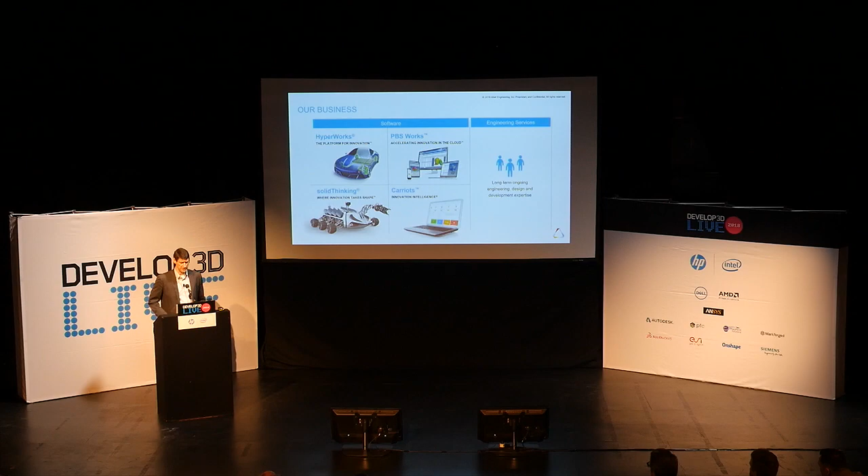So just at a glance, Altair's been around for a long time, over 30 years now. Offices across the world. We went public last year, so we're a publicly held firm. Our mission and vision statement really is to transform the way people do design. Since we come from a simulation world, our goal is really to put simulation in the driver's seat for design. And I want to talk a little bit about how that works, and how it's different from designing first and simulating second.

So a little bit about our core business. We're probably best known for HyperWorks. HyperWorks is our suite of CAE tools, which have typically been in the hands of advanced simulation specialists for many, many years. We really got started in the automotive industry. We're in the aerospace industry. Altair is a company that works at the high-end specialized CAE where you have to solve really tough problems. And a few years back we introduced our solidThinking lineup, which is a way to put that same great technology into the hands of designers and engineers who are not specialists in CAE.

And then we have PBS Works, which is a high-performance computing management infrastructure. Carriots is the latest offering we have in IoT. And of course, the core of our business has always been engineering services. We started out as an engineering services company, and software came second.

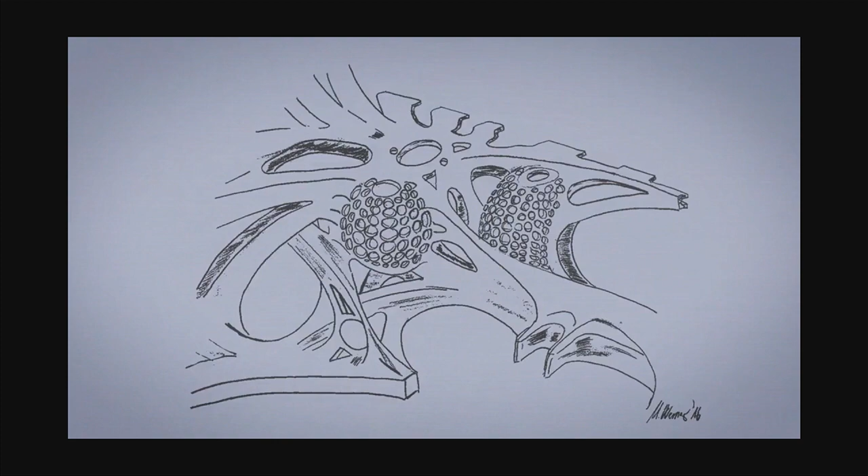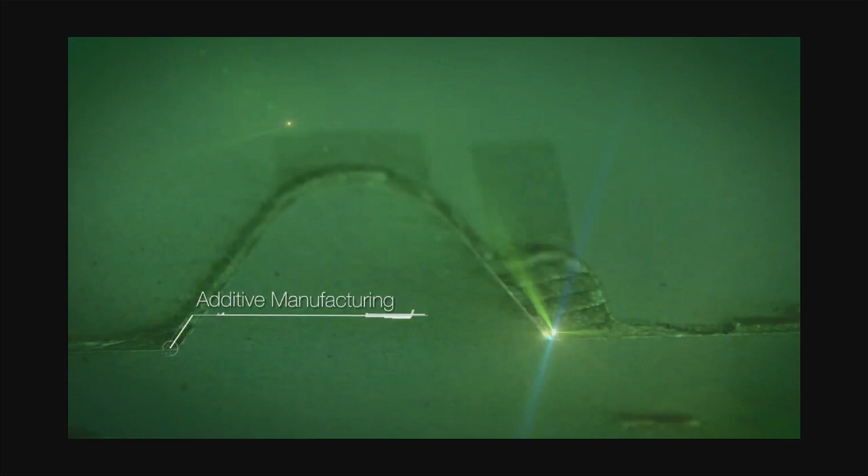So when you think about the process of design, and this is kind of the mandatory big exotic 3D print video at the beginning of everybody's presentation here. Design is changing a lot right now. There's additive manufacturing methods, there's topology optimization and generative design methods. There's a lot of new technology coming into play all at the same time, and that's creating this kind of confluence. There's another thing going on now, particularly in transportation, which is the electrification of automotive design. And that's driving a whole rethink of the way automobiles are designed.

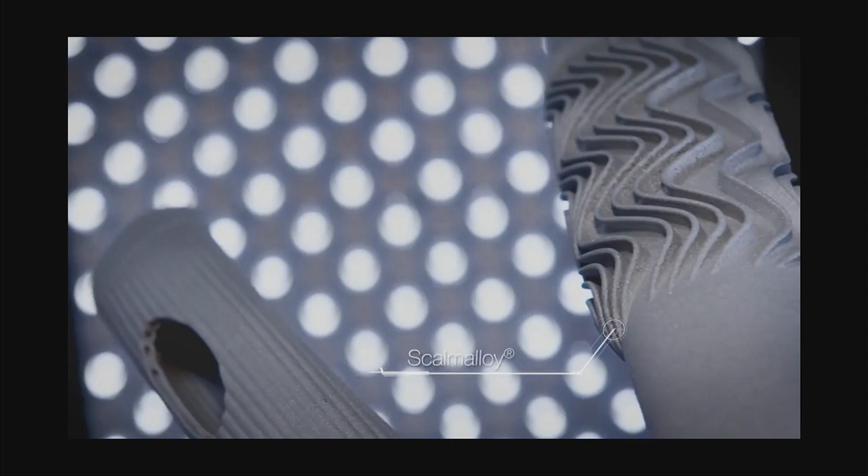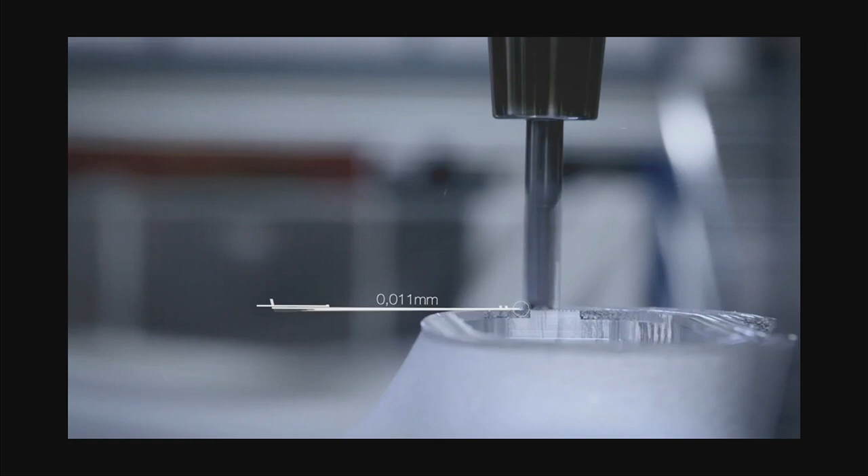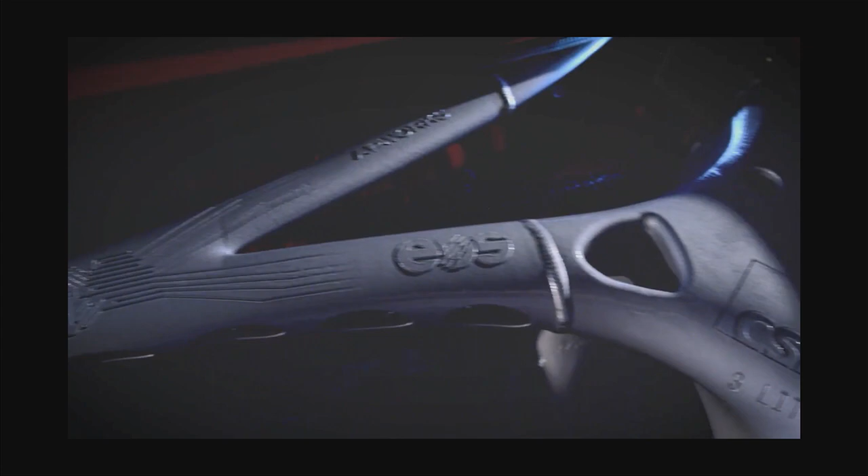If you look at this, you're probably wondering, what is this thing that's being built right here? You're going to see it at the end in kind of a reveal. You can see it's brought together topology optimization and additive manufacturing techniques. There's a lot of handcrafting going on. It's one of these stretch projects. There's milling. There's a lot of things going together. This was a collaborative stretch project between a number of companies, Altair, APWorks, CSI, and Heraeus. And when it comes together at the end, EOS was involved, and so forth. Altair gets involved in a number of these advanced projects to really stretch what can be done.

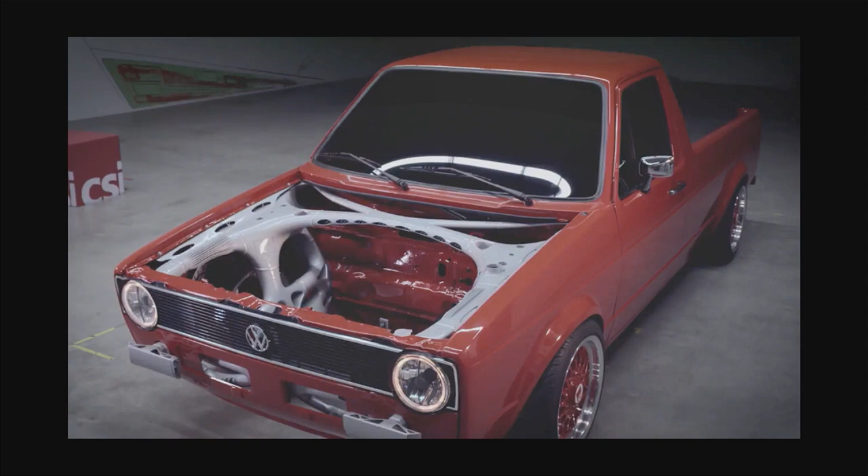So that's really the integrated structure. It's a concept structure, the front end of a vehicle that incorporates crash criteria, ductwork. If you look at all the different disciplines that went into that front structure, the idea was to bring as much functionality into a single structure as possible. So all of the cooling systems, fluid management, structures, etc., are incorporated into this concept structure. If you want a structure that's optimized for all of those things, that's a very multidisciplinary design project. We've seen a lot of examples today of topology optimization, where people just put some loads on something, get a topology out, and say, that's my finished design. That's never the finished design.

Altair has been doing topology optimization since the mid-90s. We really introduced it to the entire world through the OptiStruct product. We've been practicing its use for 25 years. And just in the last couple of years, the CAD systems are putting it in, checking the box, and it's very basic. Topology optimization is really not just about structures. It's about manufacturing considerations, and all sorts of functions that go into the part. And you've got to get the load cases right.

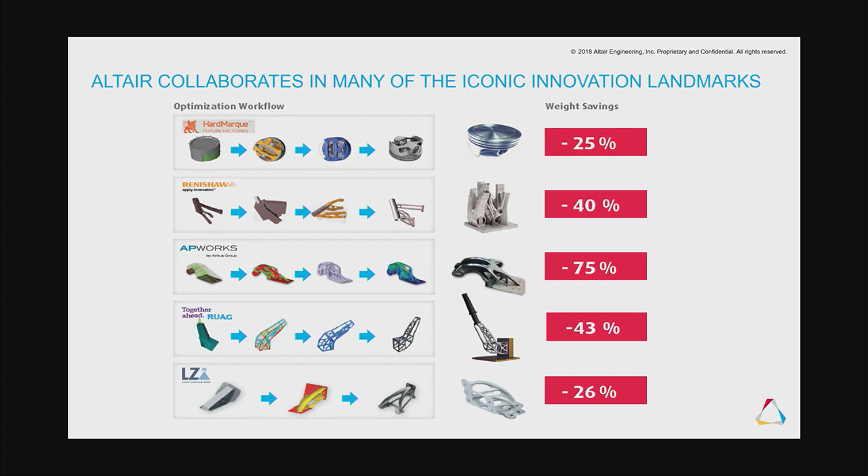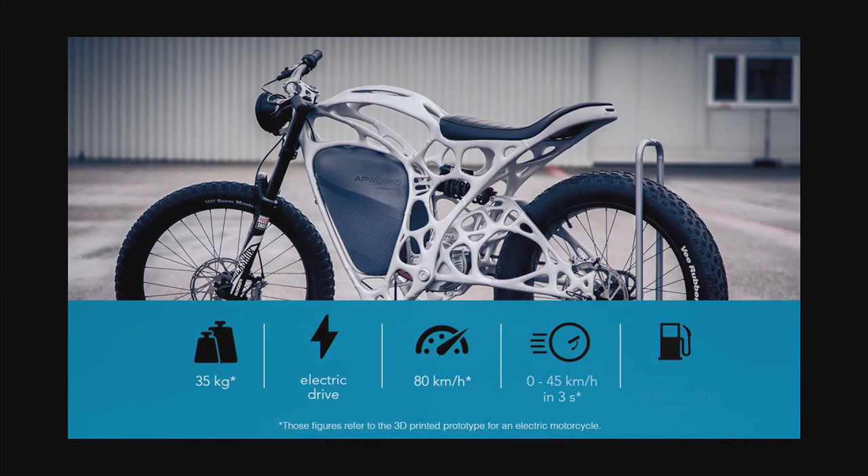Altair is always involved in these things one way or another, it seems. You've probably seen AP Works did their motorcycle project. I think everybody's got a motorcycle that's done an additive as well. We participated in that.

But I'm going to come down from these stretch projects and get a little bit more into the real world as we go forward, and begin to introduce what it really means to do simulation and optimization-driven design, not just quick topology on parts.

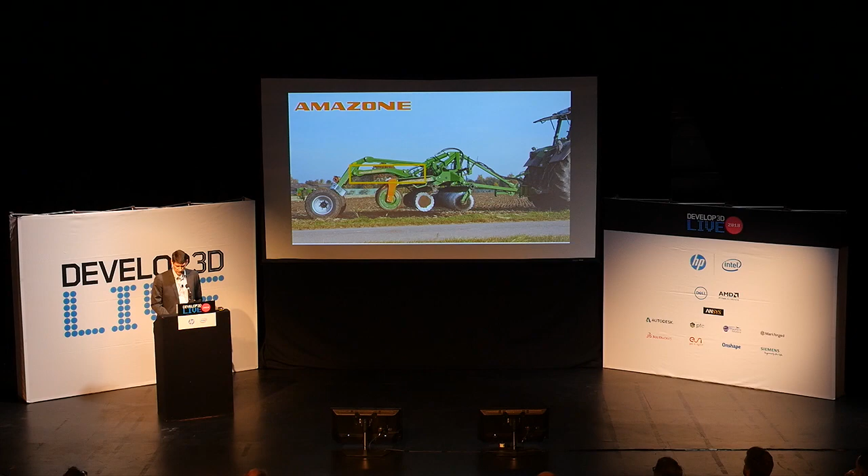So here's a project with Amazone. This is a furrowing machine that goes out and basically plows up a field. It's a very big machine. They have this central structure that's part of the main apparatus right there in the center.

They had done a design project some time ago where this was their conventional design for the structure. They had used optimization methods to come up with a lighter structure, with a lot of performance improvements. They wanted to do a stretch project out of that too, and see if they could take it to the next step where they would use a large additive manufacturing approach to build the casting.

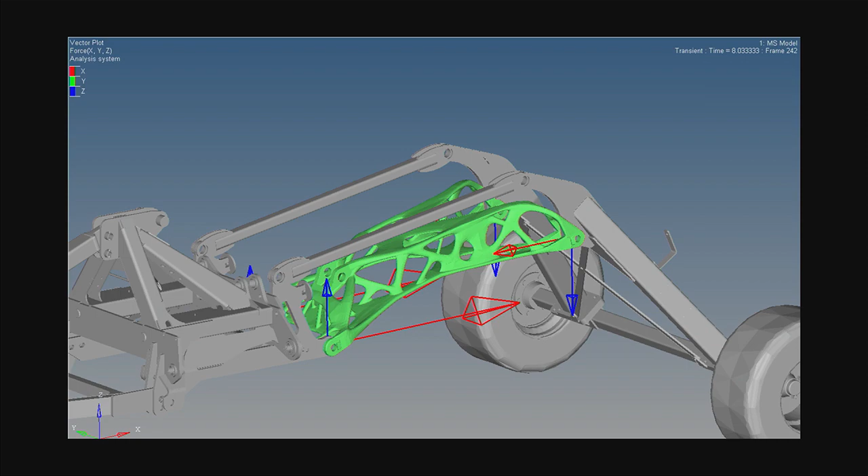Casting is still a great way to make parts. We're all excited about additive manufacturing methods all the time, and it is exciting, no question about it, but casting is by far the more important in real-world manufacturing today. But additive has a place there too, and it's to help make the castings as well. So that was the approach they wanted to take here.

Now that's a big casting if you're going to make it. So really a big part of the design project here is to see, can this thing be cast, and can it be cast efficiently in a time-effective manner, and can it be done without a lot of difficulty.

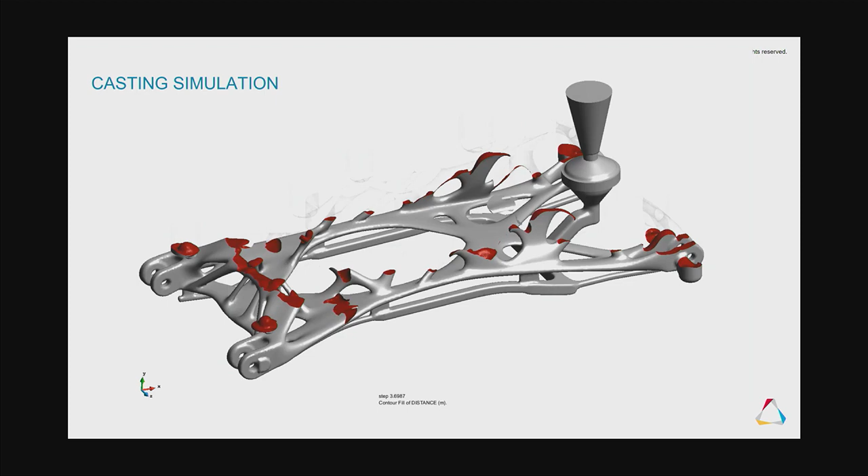So when you're designing a part, you're not just designing the topology. That was a given here - yeah, we can come up with a good structure. We know how to go through load cases and do that. But what about optimizing it further for manufacturing feasibility?

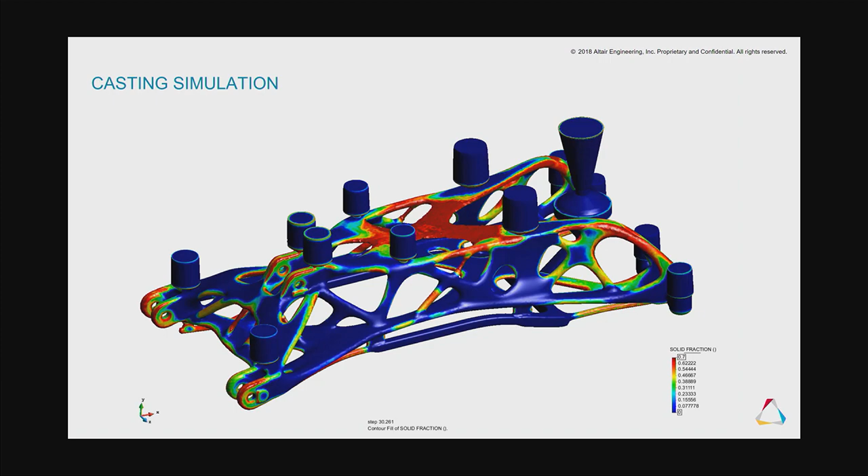So here you're seeing a simulation of the casting process. And the cooling process - well, first you need to see if things are going to fill properly. Are you going to get cold shuts? Are you going to get areas that have air pockets, porosity issues, and so forth? Then you have to look at the cool down process as well. All of these factors can influence how you might want to design that part for manufacturability.

So it's not just the basic topology optimization. It's really understanding the manufacturing process and designing for that as well.

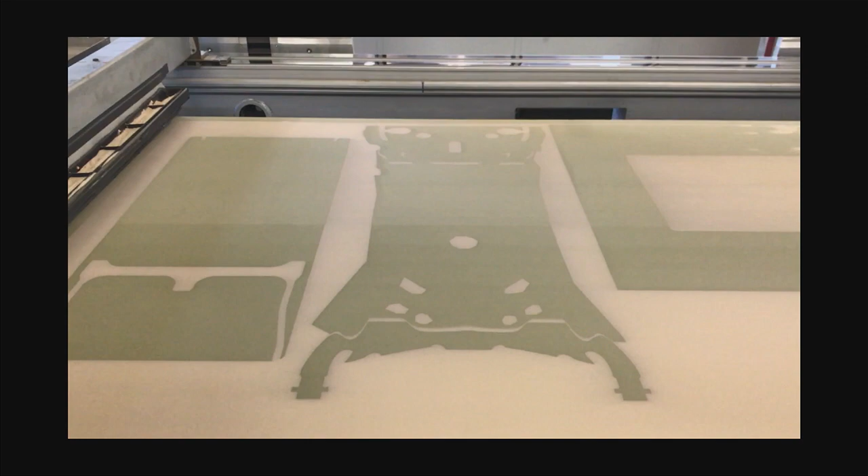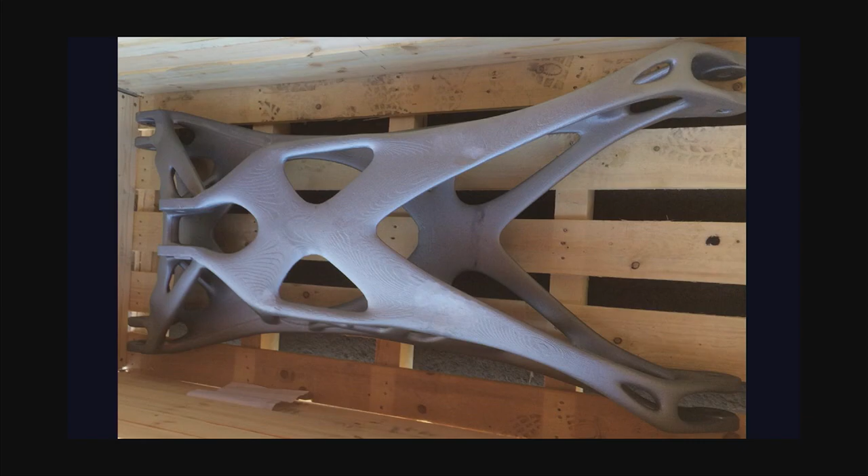And they really made the part. It goes around on display, and I think they've used it. It was a concept part. The one that's in production is the middle one there, which is optimized. And if you look at the difference between the basic welded construction versus the one that they optimized, it's substantial reductions in weight, and performance has improved tremendously.

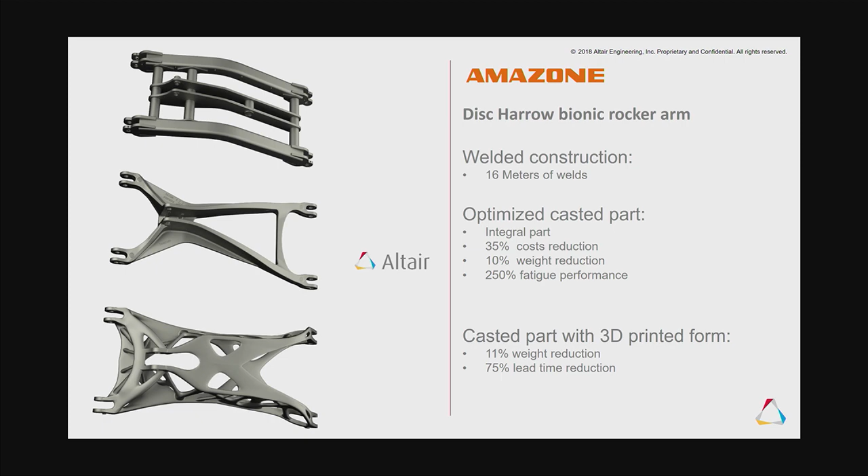And then they wanted to see if they could take it a step further with that cast part. Again, they got more weight reductions, thinner. It looks like there's more material, but there's actually less material. And they have quite a lot of reduction in the time to make that because of the casting optimization that was done on that as well.

So let's talk a little bit about the process for simulation-driven design. And for us at Altair, simulation-driven design also means making design thinking influence the way you do simulation. It's really kind of a circular sort of thing - they really have to influence each other in a loop. There's no real beginning or end to that process.

So here's just a simple project that kind of illustrates what the entire process has to be. Again, we saw a number of examples of people running topology optimization, but in reality, you have a total design project, which is: I have a certain function that I need out of the system that I'm building. Yeah, topology optimization has probably got to play in there somewhere, but I also have to do all the rest of the design - I have to size motors and springs and actuators and get the mechanicals correct.

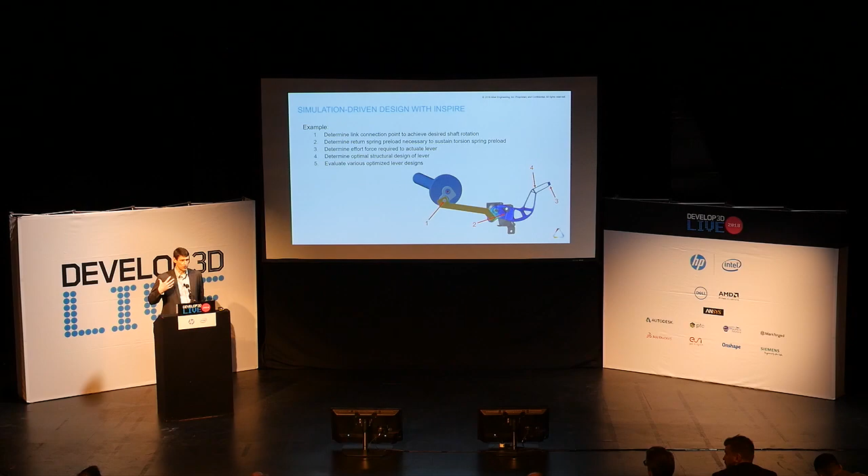And can I use those mechanicals to actually drive the loads which are governing the structure? Because when you have to just estimate loads and put them on statically, you're going to make mistakes. You really want the mechanics, the dynamics of the behavior of this part to guide the topology optimization.

That's very critical. And then you also want to be thinking about all the design iterations. The topology optimization results are never the final design, never. It's just the beginning of the design process. It really gives you ideas, it lets you explore, and then you have to do interpretations and realizations with other additional engineering knowledge that you have.

So you have all these things you have to think about, even in a very simple structure. This is, by the way, a mechanism. It's a seat lever that would be under an automotive seat that lets you lean back, forward and backwards.

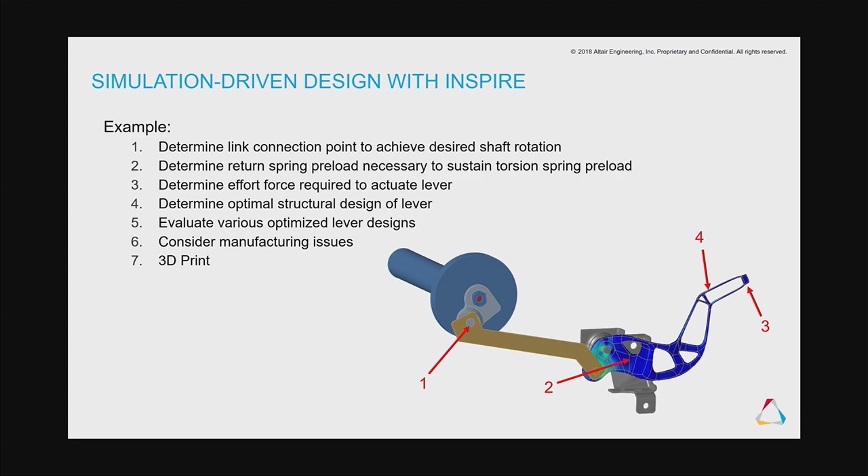Very simple structure. The design process in our software, this is the Inspire product, which has encapsulated basically a lot of our technology for designers and design engineers who are not finite element specialists.

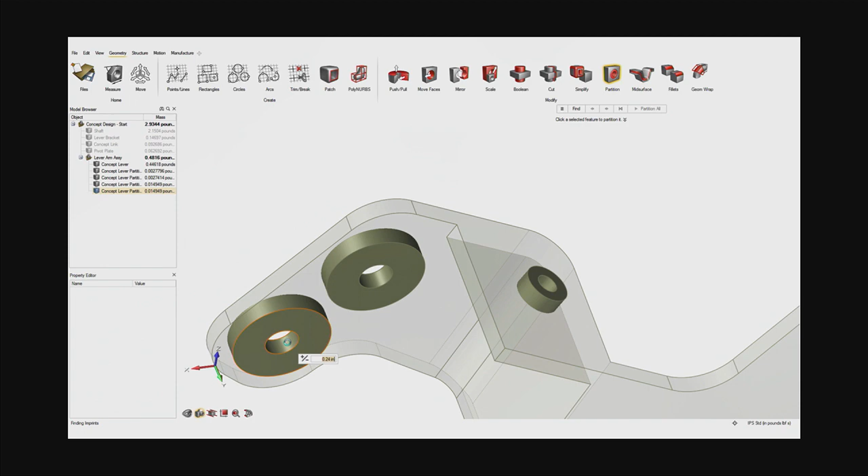So one of the things you want to do in this project is design this lever, and you want to optimize it. So he wants to have the lightest lever he can, make sure it's stiff, but he also wants to make sure that the function of this whole system is what's driving that. So he's going to set this up as a mechanical assembly.

So there's motions simulation built into Inspire as well. So here he's just taking the CAD, which is just dumb CAD, and it automatically detects all the locations where he has concentric holes and spindles and axles. It proposes joints for him. He can confirm the joints. And really just a few clicks, he can get the thing actuating.

So he's just going to apply gravity to make sure he has a legitimate mechanism here. Puts a gravity load on. Okay, so that's working. So now we can actually put this thing through its paces.

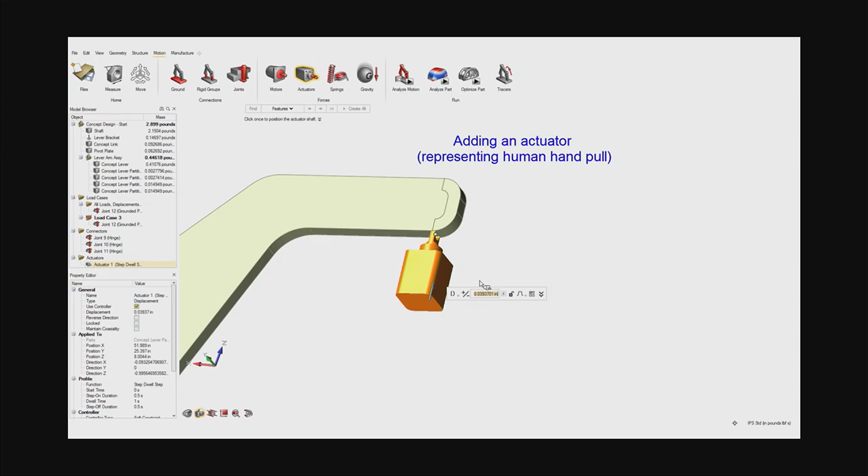So put an actuator at the end of the lever, which is where some guy's hand is going to push it. First thing he wants to do is make sure he has a proper throw, he has proper loads in the system. So he does a quick measurement. Am I getting enough throw?

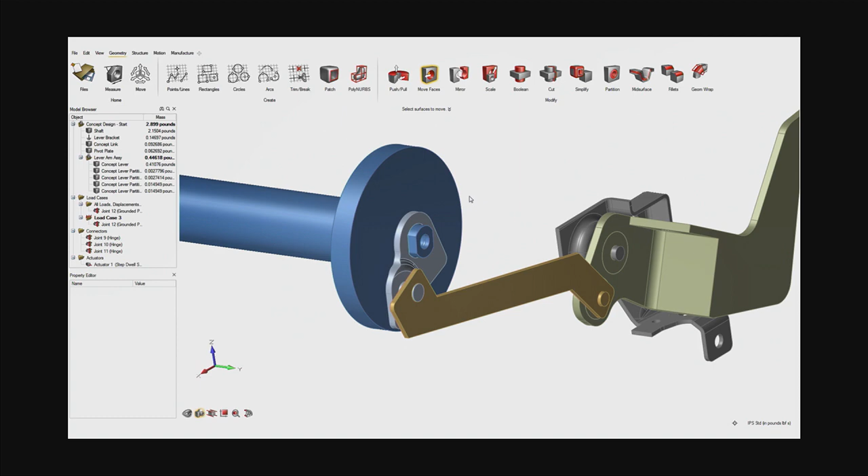Maybe not. You probably have to do some geometry changes. So he's going to move some pivot points. There's some basic geometry editing tools in here to make sure that you can do direct modeling and move your pivot points around. Then he does a quick confirmation check, moves the lever, make sure his rotations are correct for what the mechanical assembly has to do.

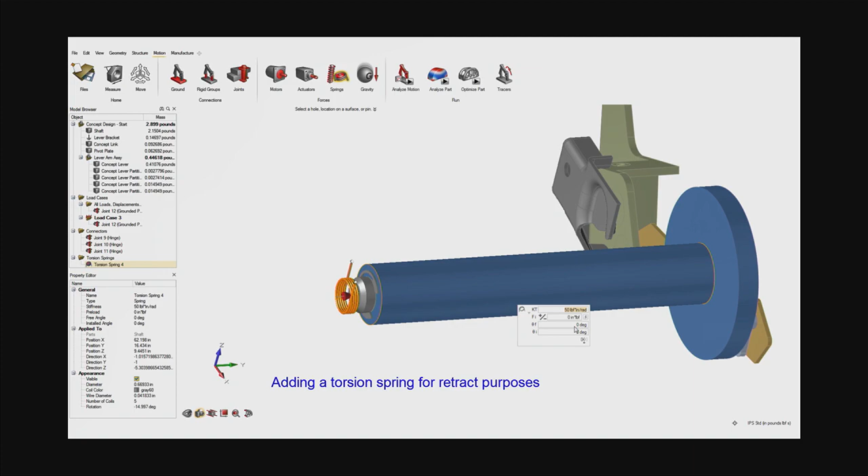And now he's got to get the loads into the system, because right now he's just moving it kinematically. But there's going to be resistance springs and so forth in the system that return it to center. So he's going to put his springs in. In Inspire, we have all these mechanical elements like motors and actuators and springs and stuff.

You just put them in, and it represents them in a kind of a WYSIWYG way, the way they really are in real life. He puts in an actuator just as a way to measure the force in that system. And again, just a few clicks, he can rerun the problem, and now he's going to have a fully statically determined system that has all of the resistance components in it, so springs and so forth.

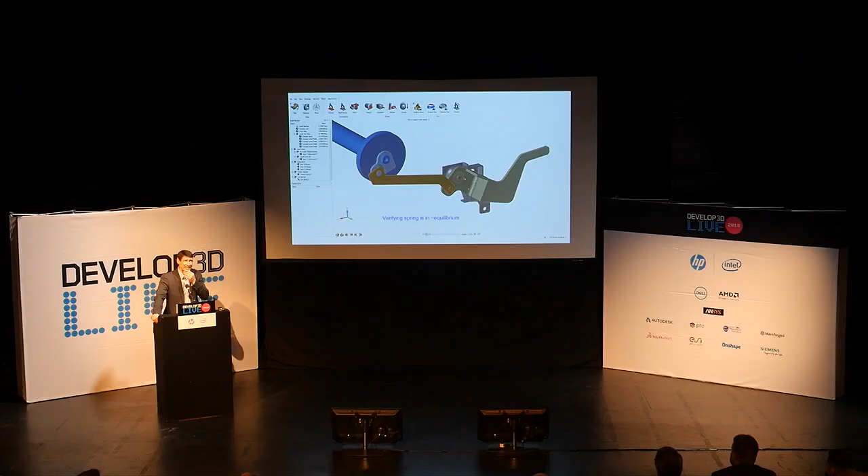So now once you have that, you can actually then get all the loads you need when you move the lever and get the topology results. The old days you would have tried to think, well, okay, I think he's probably going to put so many forces in here, I'm going to come up with a couple load cases that represent it.

What we really are doing here, we're going to run that through at every position that it can go through with the loads coming from the actual mechanism. So we know all the loads through the entire sweep of that part, and that is what becomes the boundary conditions. You don't have to guess at anything.

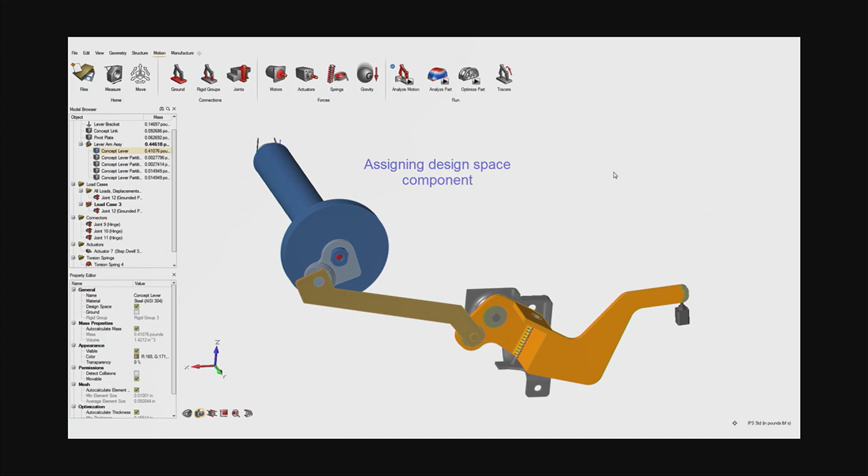So now he puts the actuator back in, and he can now run the mechanical assembly and just turn on Topology Optimization. Here he just hits run, and there's a number of different things you can ask for. We have a lot of manufacturing constraints, so if you know that you're going to be doing extrusions or castings or things like that, you can put those as constraints.

So now he has the load paths. Again, the first results, those are never the final results.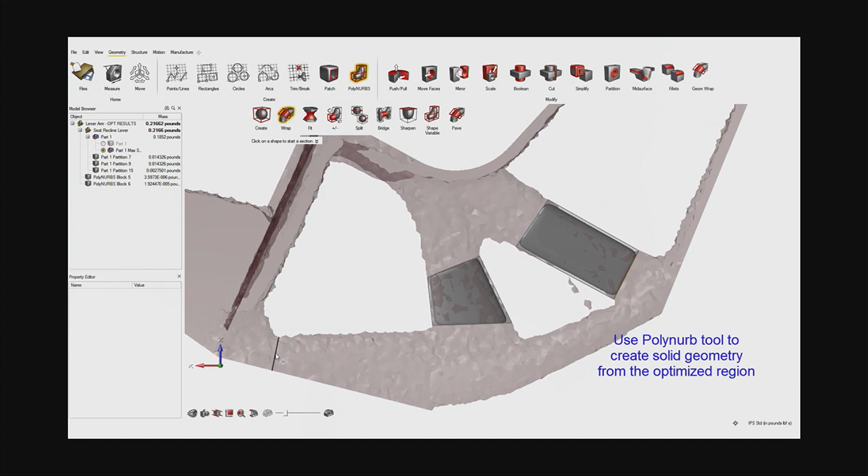Now we use a method to capture these, which is called polyNURBS, and it's a manual or semi-manual process. We're getting it closer and closer to a one-click process. But there's high value to doing that step, which is that you get this control structure around the shape of that part, and you can do further optimization on that control structure. So we don't just look at that as a final design. You may want to do further optimization, moving all those controls and the lattice work around that.

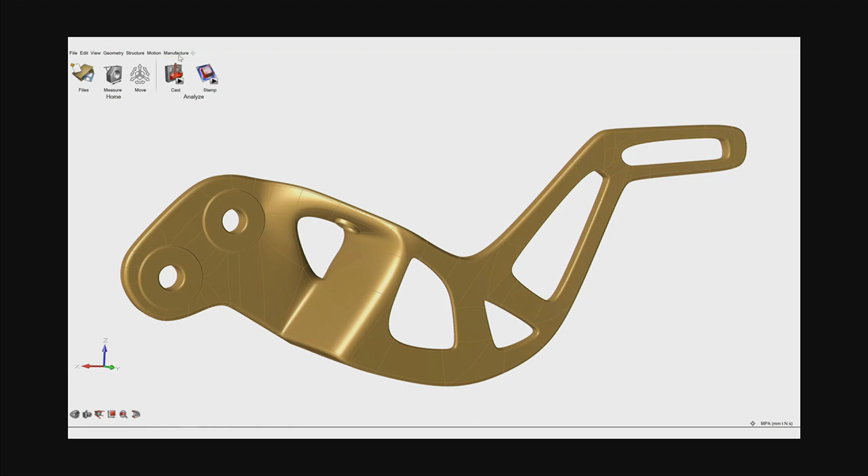Here now he's run his part, he got his optimization. He just uses the same load case setup that comes from the mechanicals. And now he's going to realize that in different forms. So he makes three different forms of this lever: one that's good for additive, maybe one that's a sheet metal stamping, and another that's a traditional casting, say.

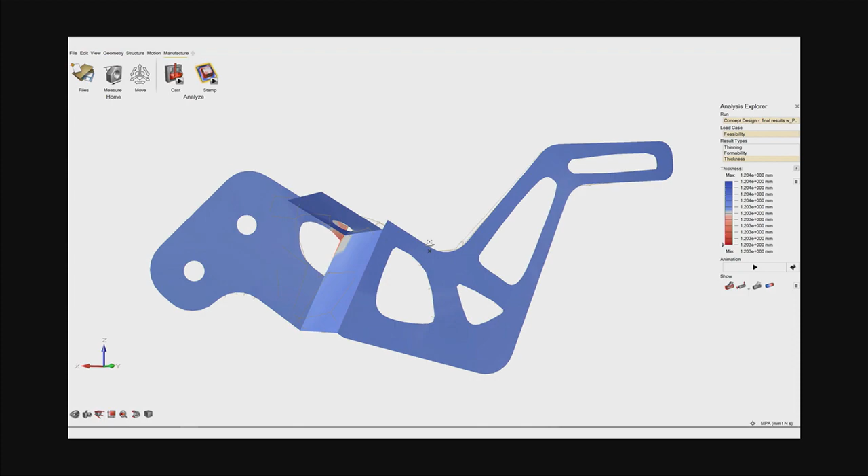So we have feasibility checks in the software as well. Here I can do a quick feasibility check for casting - just one click and it can tell me where I'm likely to get porosity issues because of typical cooling. Now I have a stamped version of the same part. I'm going to run a quick forming simulation. It can tell me where I'm likely to have thinning problems, where I'm likely to have high strains. And I might want to make quick design changes based on these really quick one-click feasibility checks.

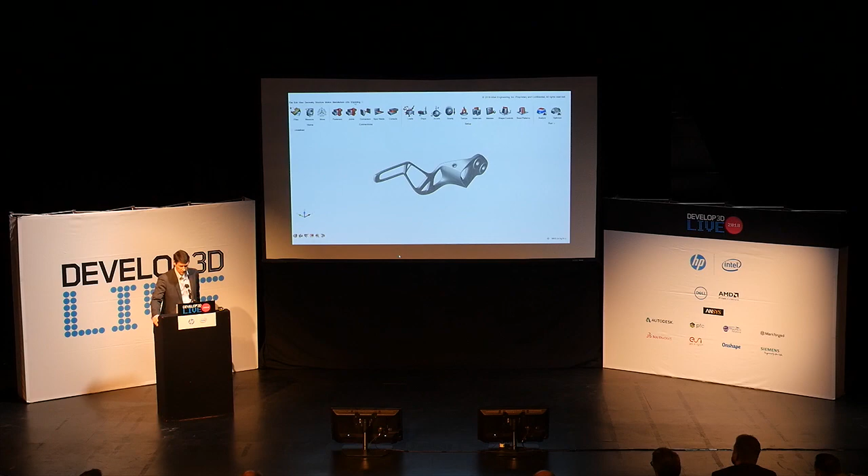So for us, it's really important to be thinking about the manufacturing issues. You may decide, okay, that manufacturing process, maybe the forming is just leading down a path which is going to be a heavier structure - I don't like it. So you really want to be able to do these comparisons between these different realizations very quickly.

Here we're working right now on an additive manufacturing setup. You've seen it a million times, but we're putting it into our software as well, so you can design all your supports. It'll do suggested supports for you. You can do manual modifications - they're embedded into the system. Again, if you go back and do modifications to the original design based on optimization, the supports will carry along with it as well.

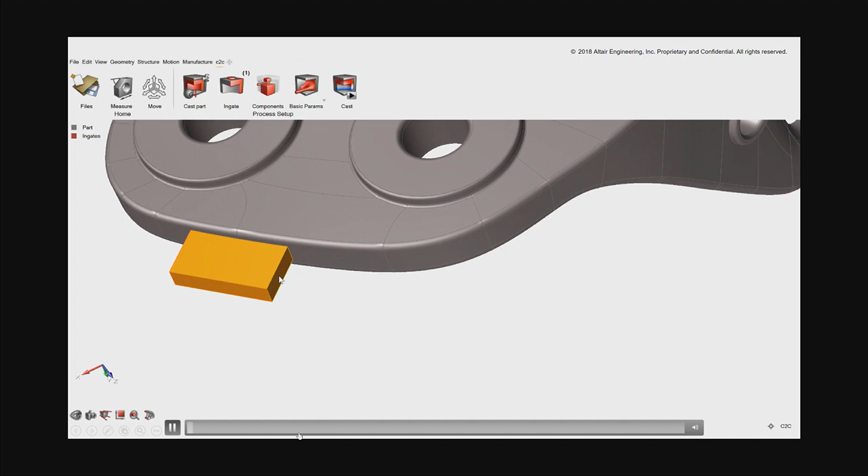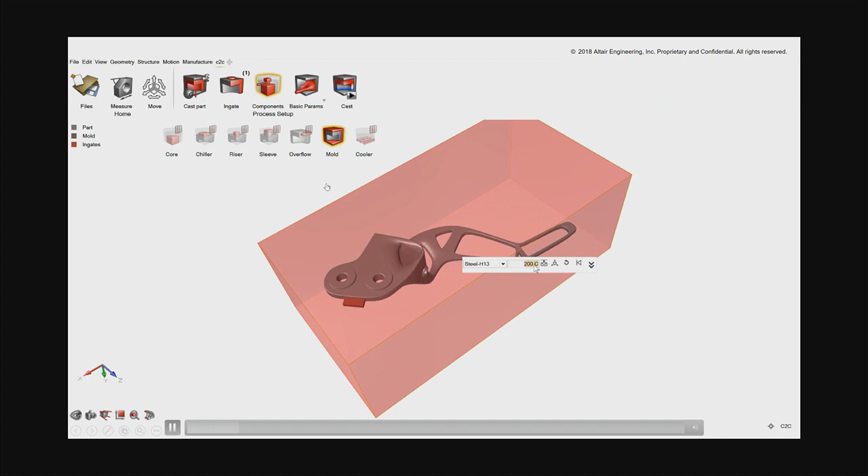And then finally, if you want to get more into the details of the casting or the forming, there's a whole series of really detailed simulations you can do for those manufacturing processes. Again, on the original part, same environment. So here we're going to set up casting - I'm just going to skip through it. We have an entire way to set up everything there is to know about casting here. You can set up the mold, you can set up coolers and chillers and risers and runners of all types, and then just rerun the simulation in detail.

So here we're looking at an example where - am I going to have cold shuts? Does the material begin to solidify before it closes off and reseals? That's a big deal, so you might want to go back, readjust your input conditions, just using the regular tools that are in here. For us, the goal is to put the optimizer around these so it can actually suggest areas to put in risers and things, so you don't even have to do that. If it knows you have a hot spot in the model and you need a riser, it'll suggest that and the riser volume to you as well.

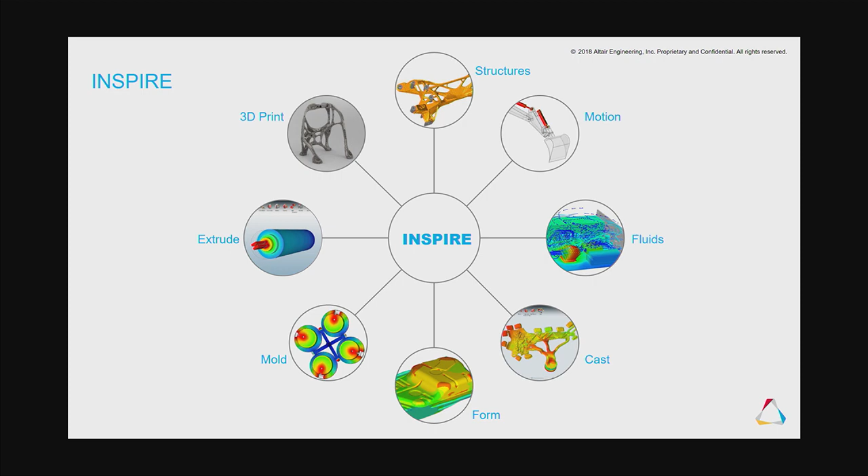And so here he goes through more and more details of setting up his casting simulation. So what we've done is created this Inspire environment, which started out as just basic topology optimization. Now it has motion in it, it has manufacturing simulation for casting. We're working on forming, and molding is coming, and 3D printing and extrusion, all in one nice form. And it's all about design generation - we don't design a part and then just simulate it and see what we got out of it. You're really using the simulation to drive the entire design process in this product.

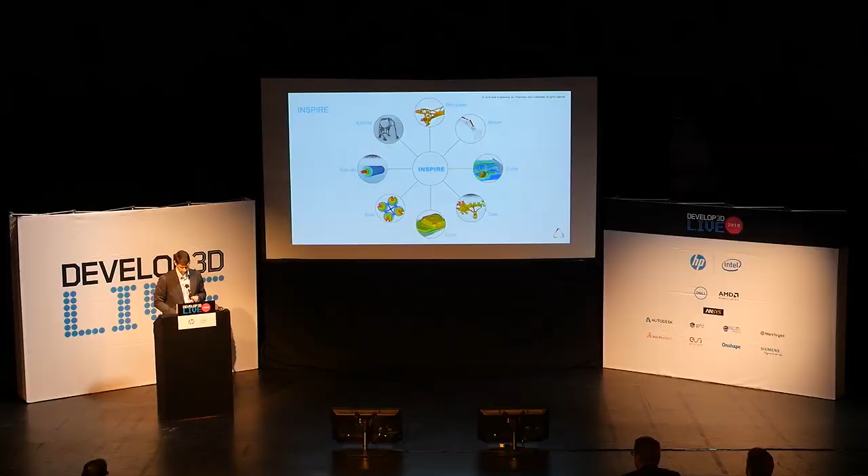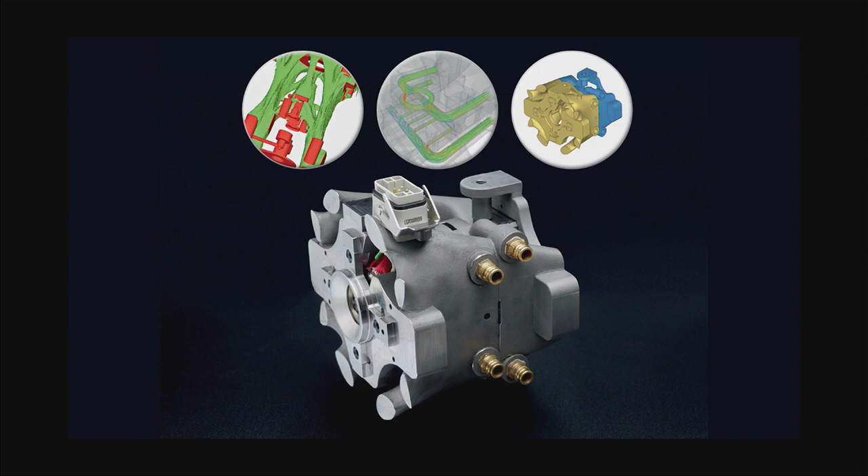Okay, let's look at another real-world example here. This is an injection molding mold. If you're familiar with injection molding, it's a high-pressure process where you have a metal mold. You're usually going to make a plastic part, and you're going to inject molten plastics or polymers into these molds. They're actually quite high pressure - you have to push them together really hard because you don't want any flashing to occur, so the molds come together at pretty high pressure. You want to use as little material as possible because you want to prevent the mold from heating up and staying hot, because that slows down the cooling of the part and really reduces your part rate.

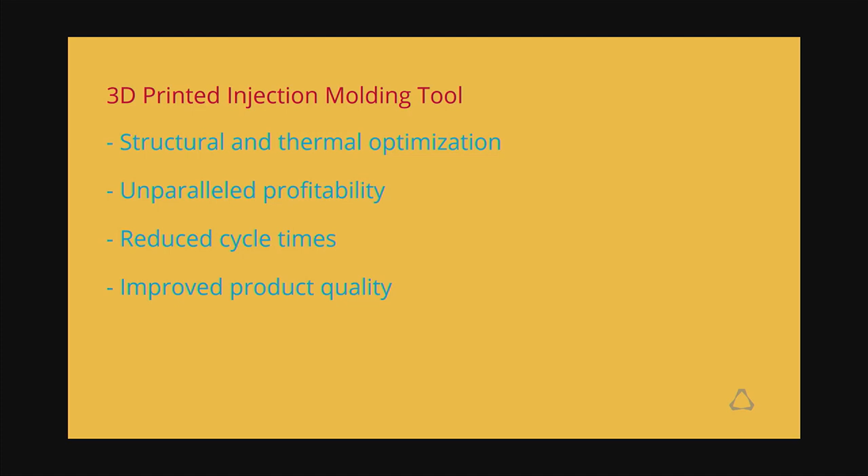So there's a lot of things to think about when you're doing the optimization for this. So you start with the design space here, and you could begin with the structural design of the die halves. It'll come up with the minimal amount of material under the pressure you need to keep that mold in place when you put the polymers inside of it. That's step one.

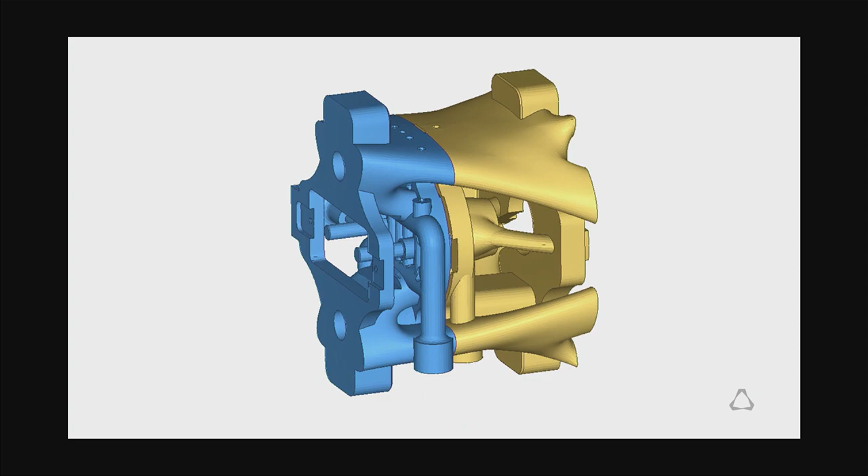Then you also have to do the simulation of the cooling of this process as part of the overall job. You'll have to take into account the cooling, piping, the plumbing that goes through it, as well as the cooling effects of the surrounding structure you just designed. All of those have to work together to get the optimal solution.

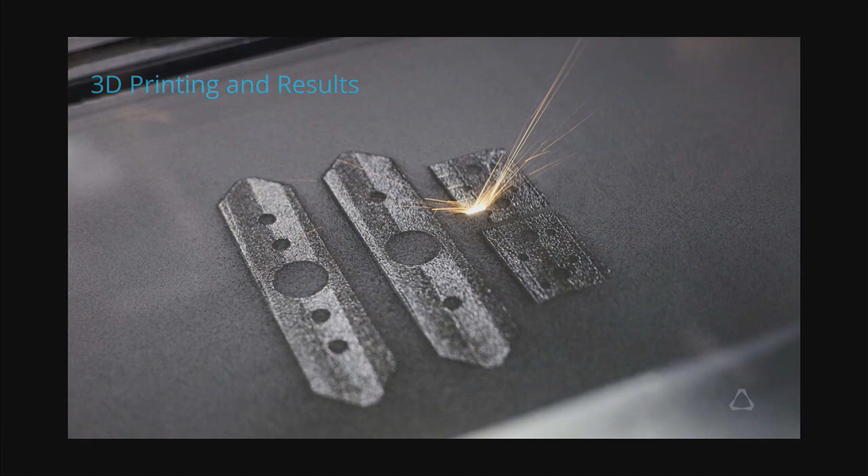So we're putting CFD into it right now. We have all the CFD and cooling capabilities in the software inside of the HyperWorks products, and we want to put those into Inspire as well.

So here's a case where the company that makes these injection dies, they make many of these things, uses this as their process today to design their dies. Their goals, of course, are really to get a low-cost die that's high-performing, but they really want to get their manufacturing rate to be very high. To do that, it has to cool very quickly.

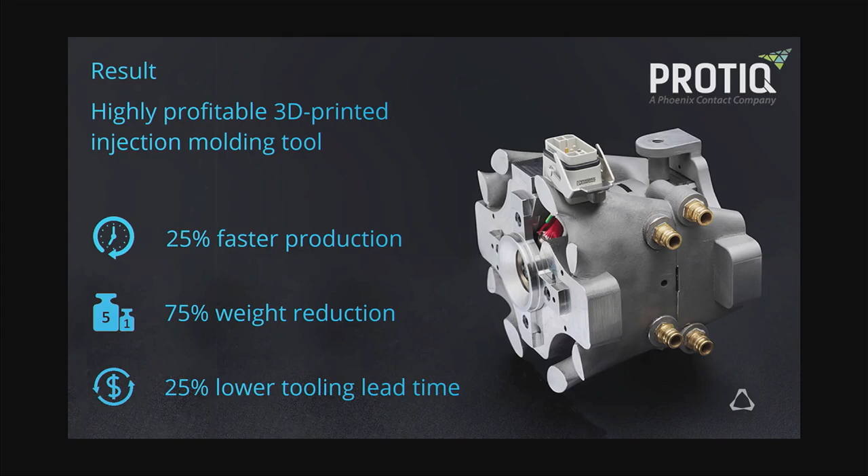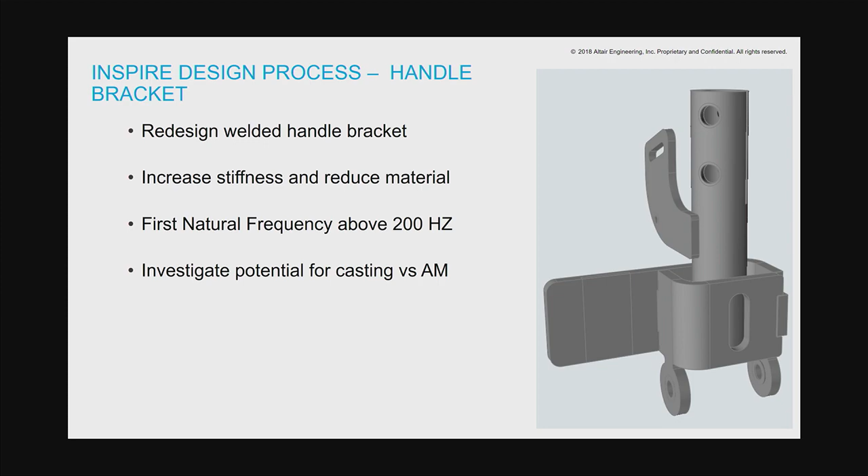And this is real. Okay, just looking at a couple other considerations on the manufacturing end. So here's one more example here I'll do with some of the optimization where there's two different realizations. This is some sort of lever handle that goes on a shaft. And there's a whole number of different things you have to consider with displacement constraints and so forth.

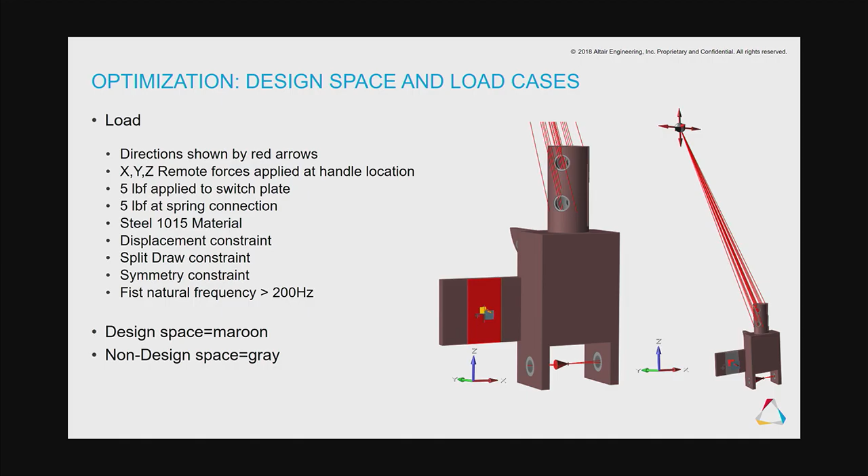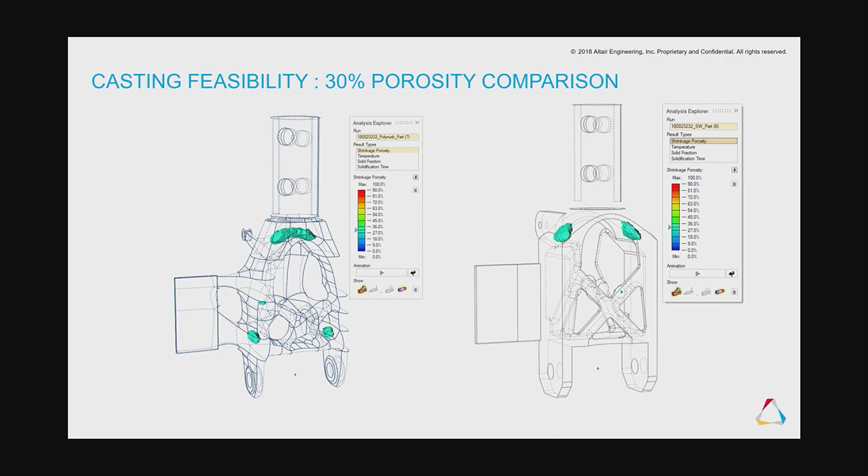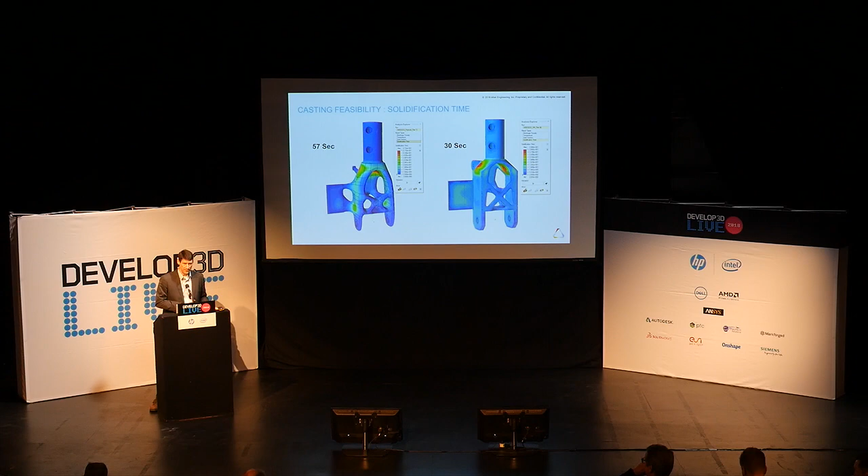That's what parts look like these days. But you really don't know the answer until you've gone through the whole thing. What's my manufacturing process? Which one is going to be more castable? Just doing a quick check, you'll actually find it could be that the one on the left that looked really great, if you're going to cast it, it may take too long to cool down, so you're going to have to do more design iterations on it and so forth too. So knowing this upfront in the early concept stages is always critical.

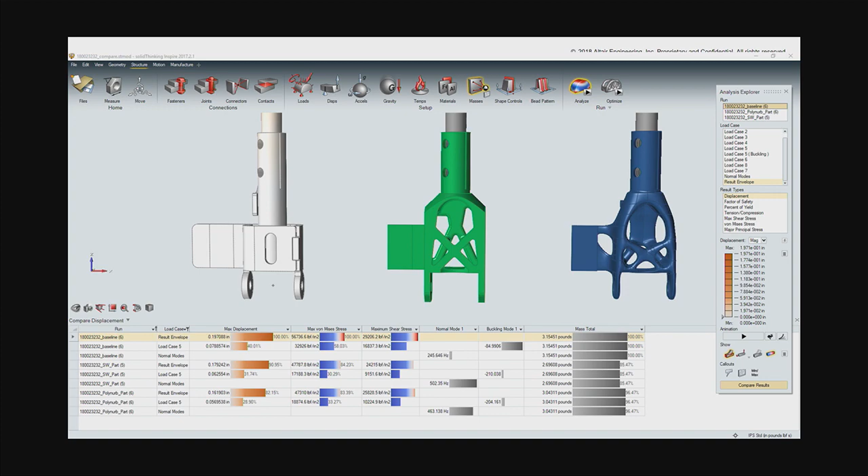So what we've done is, because there's these design iterations that take place in the real world of design optimization, we put in these ranking tables so you can look at all the performance criteria of your parts and rank them against one another. Because anytime you're doing optimization, you're thinking about 4, 5, 6, who knows how many different disciplines that you have to judge these parts on before you know they're correct. And actually being able to visualize them and sort them in these built-in tables is very handy.

So just kind of looking philosophically across things, CAE, because Altair came really from that CAE world, it was used early on really to supplement test and then to replace some amount of test. Now we're seeing today, as we get into the 2000s, it's really becoming a significant driver in the design process itself, being used very upfront in these ways to actually get to the design upfront.

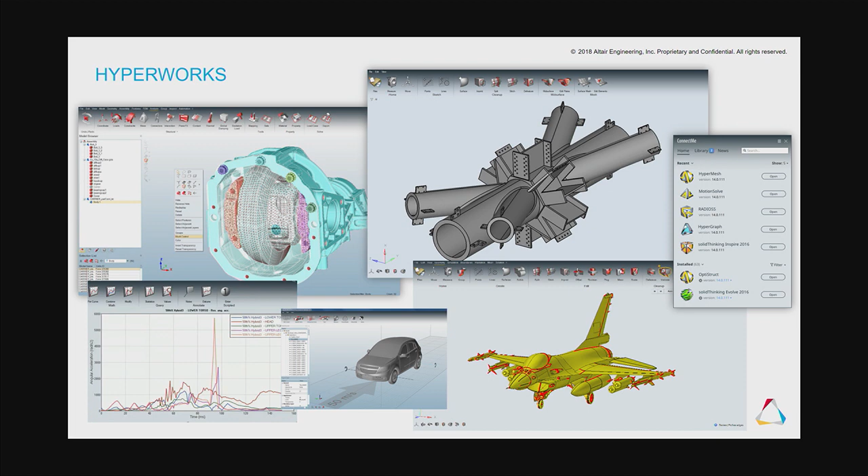So, which makes you kind of think, well, what about those guys who are the CAE specialists? So we're working from that end too, because we have many customers that are high-end CAE specialists. We want to make their lives more design-like so that they can influence the design as well, even from the very high end. So we've been working on an initiative: if you're familiar with HyperWorks, it's had an older user interface. It has this new Inspire-like user interface now that's coming out, so it's much more of a design-oriented workflow in that software now too.

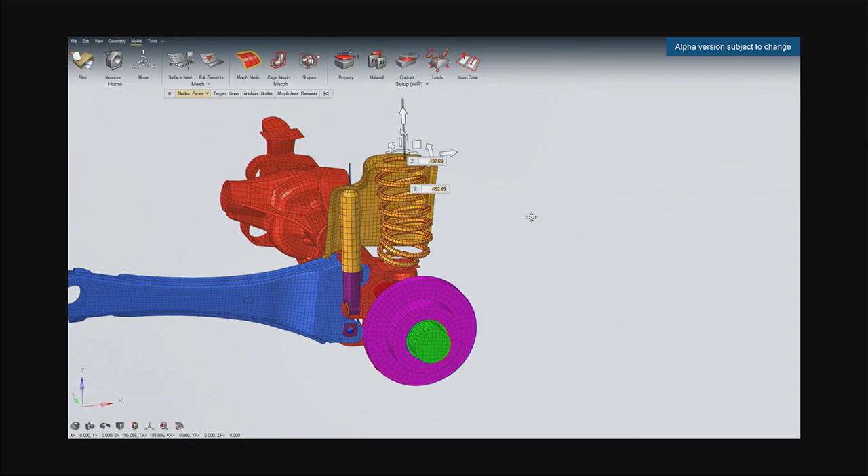So if you are a CAE guy, we're putting those same types of direct modeling tools into the CAE world. So you can do these direct modeling changes, lots of new morphing tools going in, and just grab things and drag them. What's cool is it's really feature-oriented, even though it's a finite element model. We want the finite element guys to think about design changes in the same way that a designer would in a CAD system. So it's really identifying features inside of the FE representations of the models and letting you move it around just like you would in CAD.

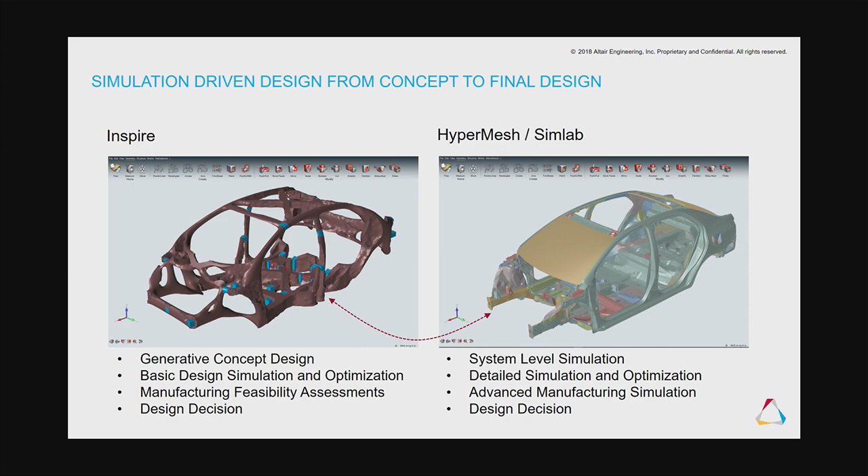Okay, so Altair, as I said, has been practicing optimization for decades. And we know the pitfalls, and we've been applying it in a really sophisticated way to full systems, not just little brackets and things. So here's an example of how we begin to use it in full vehicle body structures. If you look on the left, we have Inspire. That's really for this kind of generative concept design, quick, without thinking about finite elements. Those models can be promoted up into HyperMesh with the new user interface, and you can go into the full system level simulation and really detail it out with all kinds of additional details.

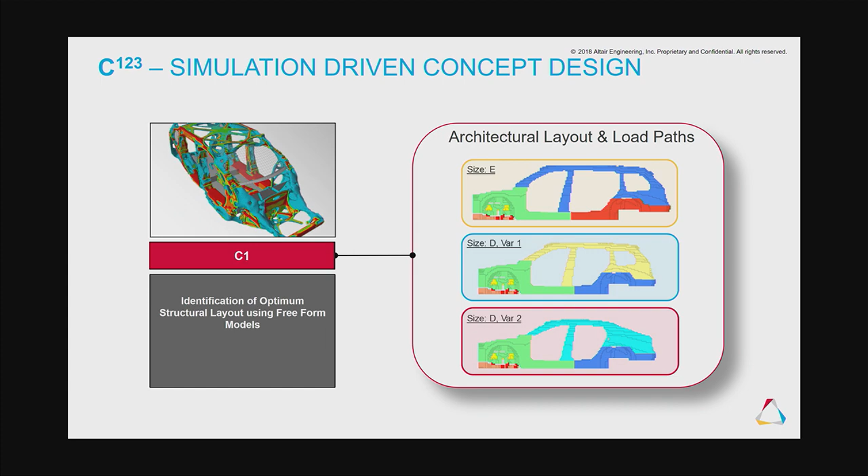But looking at automotive for a minute, it's a really great time for rethinking the car because of electrification. You remove the powertrain, you remove the gas tank, you put in batteries. The whole vehicle structure is being redesigned right now and rethought from the ground up, literally. We've been practicing for many years different ways to approach an architectural process for doing this optimization for vehicle architectures, which we call C123. The basic steps are, one, you do your load path generation using topology optimization. You can imagine the load cases you would see on an automotive body. There's many, and many of them have to be linearized from crash events and so forth for safety. So it's not just about putting a few loads on this thing, it's about bringing in a whole set of boundary conditions that the real world car would see.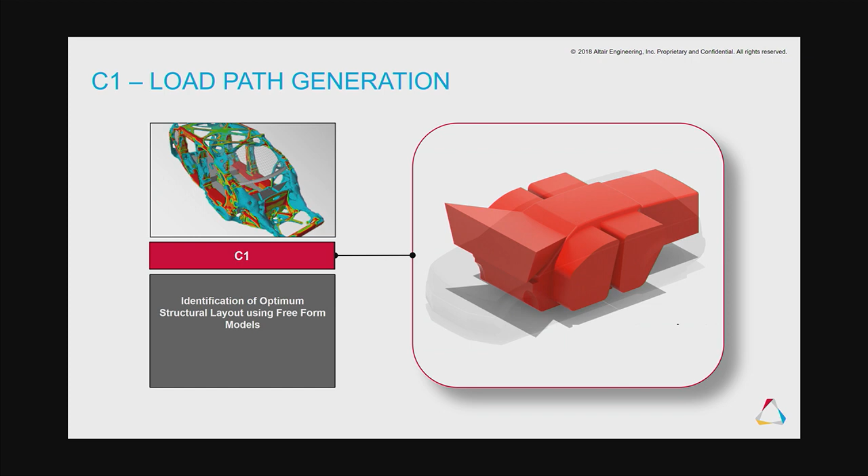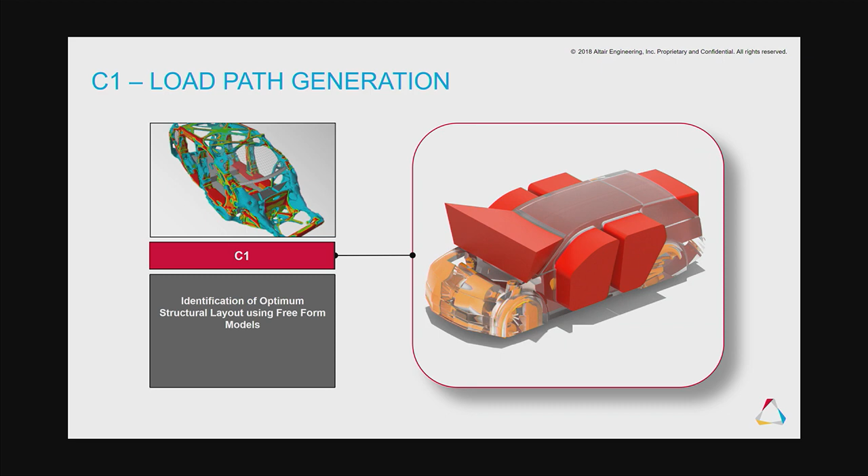And then once you've got the study of all these load paths through the vehicle, well, to set that problem up, you also have to create the design space as well. So there's a lot of things that go into the design space generation for a vehicle, including where the doors are and the seats and people. There's lots of negative spaces and positive spaces, which create a very blocky design space that then generates those load paths. Once you have those load paths, those get interpreted. So you're not done there. That's not a finished car by any means. It's just a blocky set of load paths.

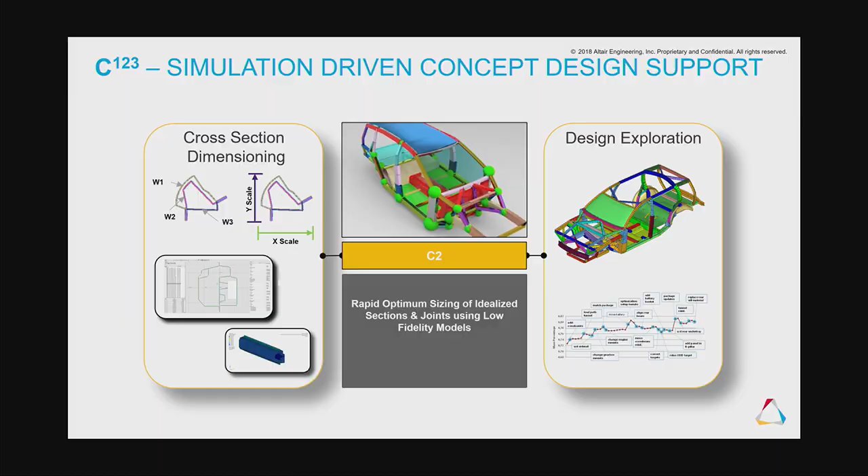You then refine those load paths into what a car would actually be, which is sheet metal that's been stamped and cast in different areas for joints and so forth. So then you begin to interpret those designs into these sheet metal structures. And again, you want to stay low fidelity at this point. There's no one-button car. So you have the low fidelity beams that come out and the joints, and you do some optimization on those. You optimize cross sections, you look at lots of iterations, and so forth. And so you go through this continual refinement, and the vehicle gets more and more accurate, from a very blocky thing to a final sheet metal part.

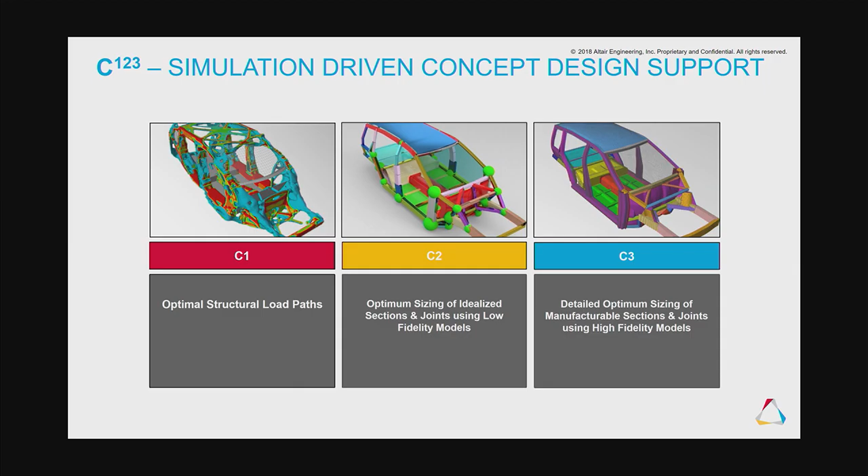And there's no CAD in the loop here. There's not one bit of CAD that's been brought in other than maybe some historical data. You're really working totally in a simulation environment, an optimization environment to do this. This is the way it's being done today. This is not far in the future. This is the practice today that Altair has developed and is using with its customer base. That's what it looks like to set up these problems.

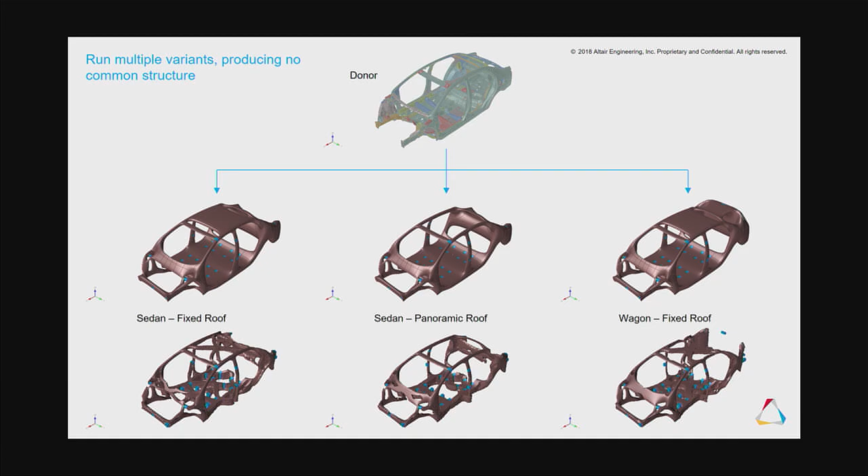Another thing to think about with optimization—and this applies not just to vehicles, but optimization in general, though vehicles are a great case of it—is that here we have multiple configurations of this vehicle. It has, say, the sedan, maybe a wagon version, different roof configurations. There's multiple configurations of these vehicles.

And there's a lot of carryover pieces. Maybe the bottom structures, you want a lot of carryover there. You want the optimizer to give you the same answer for the bottom structures because you want those to be carryover, but you still have to optimize it for not just one vehicle, but all the configurations. So the optimizer is really optimizing all these models simultaneously, when you've told it, please give me carryover parts.

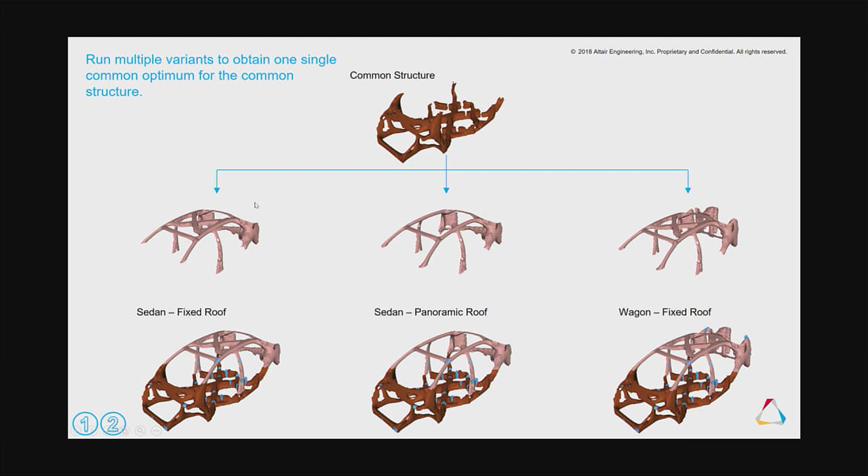And that's something else that you don't do when you're just doing brackets, right? This is systems level stuff. Lots to think about. So in a typical automotive scenario, the bottoms are all the same for all these configurations, and you'll have unique tops. So that gives you your optimization across all the vehicle configurations.

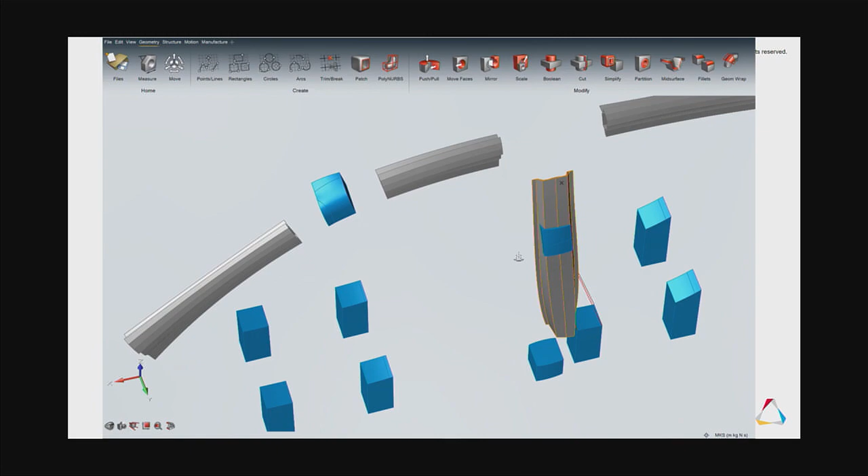And then you can think of new ways to realize it. This is some area of research going on today—what's the fastest way to realize these load paths through the vehicles, not just as these kind of organic shapes, but as something close to manufacturable. So here we're fitting over the topology results with fitted beams. We know what the general shape of the beam section has to be, so we can fit those to those rails and things. So you get nearly finished sheet metal for your beam structures when you realize these things.

And then once you have these, you'll do further fine-tuning of the optimization of the cross sections and so forth. So what I really want to leave you with in this illustration is just the levels of steps you go through in a really holistic optimization process. It's not a one-button job. There's a lot to be thinking about, and the software needs to support these types of processes.

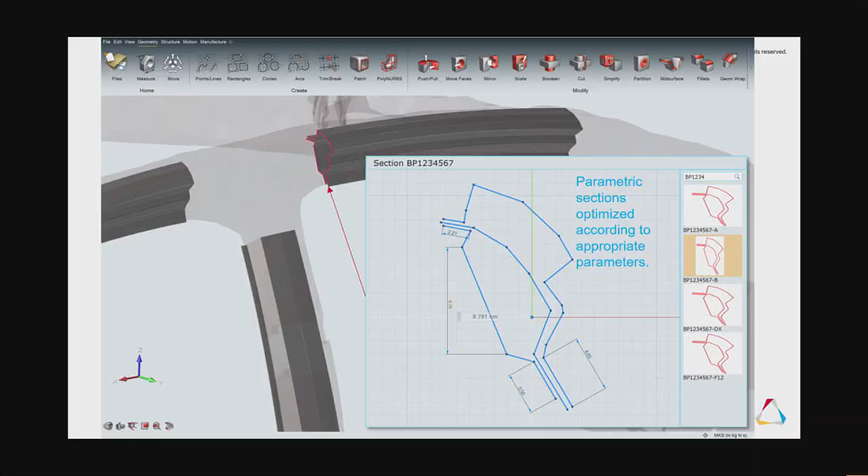So this is just a summary slide of that whole architectural approach to optimization. Again, it's done with vehicles here, but it really applies to any kind of structure. It could apply to buildings, ships, aircraft, and so forth, where you're dealing with multiple configurations of the product in multiple stages of fidelity, from the topology optimization to the beam structures and then the joint structures and so forth, all happening simultaneously.

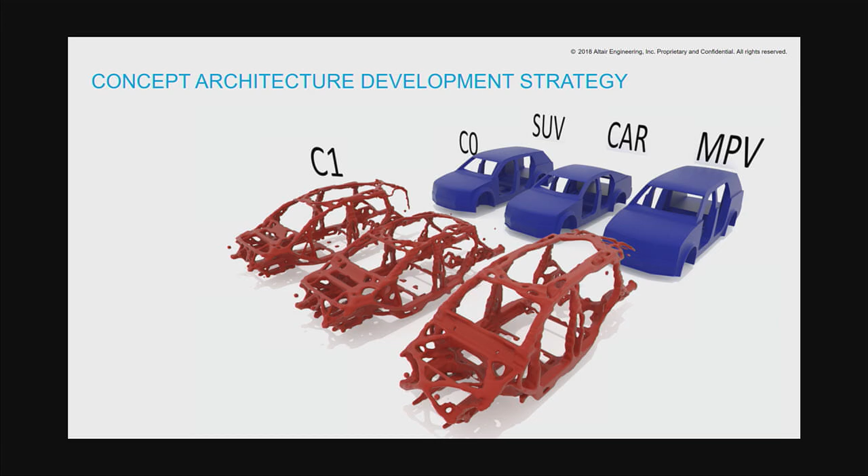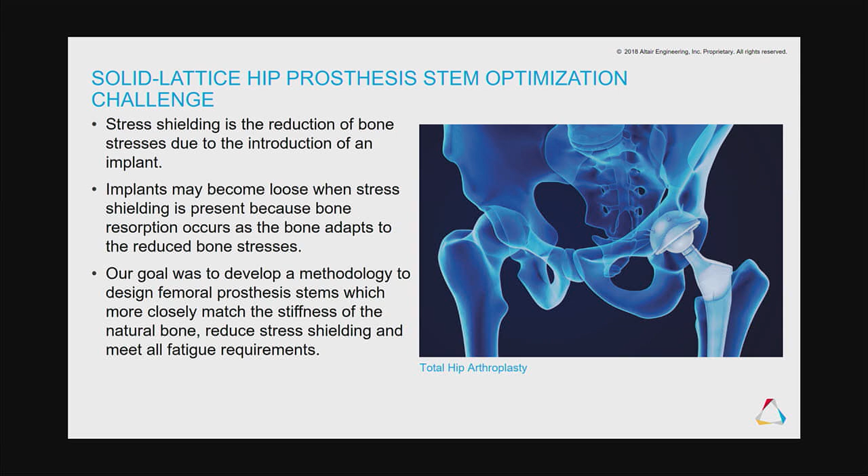Okay, and then I'll leave you with one last example in the medical field, which is another great example of optimization where you're not necessarily looking for the best, lightest part. You're looking for something that performs in a very specific way. In the medical field, when you put an implant in—here's a femur implant we're looking at—there's a particular challenge which is unique. You don't want the stiffest part. What you want is a part which matches the stiffness of your own bones.

You know the way bones are, right? If you stress a bone, it grows more in that area and becomes stiffer. If it's unstressed in an area, it becomes weaker. So the implants, if they create artificial stresses in local parts of the bones, they can grow too much in certain areas. If they don't stress them enough, they get too weak, and then you have failures. So what you need to do is design an implant which behaves as much like the actual bone does in terms of its stiffness and compliance as the original bone did.

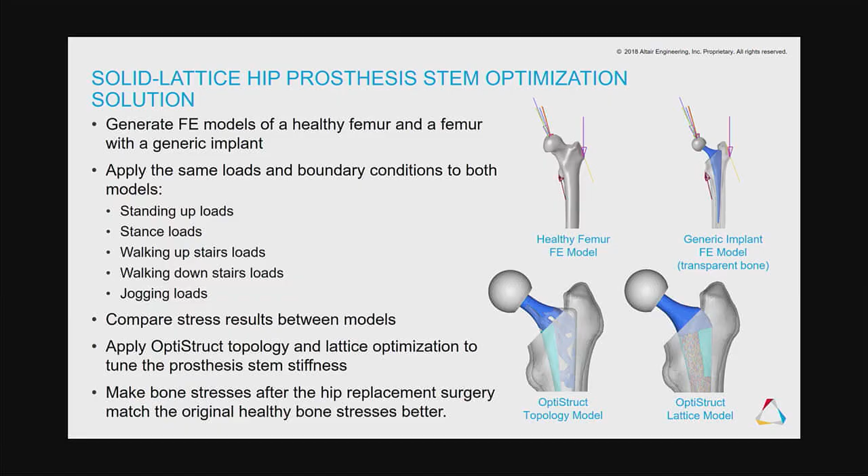So your optimization goal is stiffness targets to match the bone, and you set goals to minimize the difference in stress that the bone would see if there was no implant in it. So here's maybe a healthy femur that's been subjected to the typical load cases, and there's quite a few load cases on the human femur you have to account for. If you put in a traditional implant, you may create lower stresses in some areas and think that's good, but it's not—it's bad. You actually want to stress those areas properly.

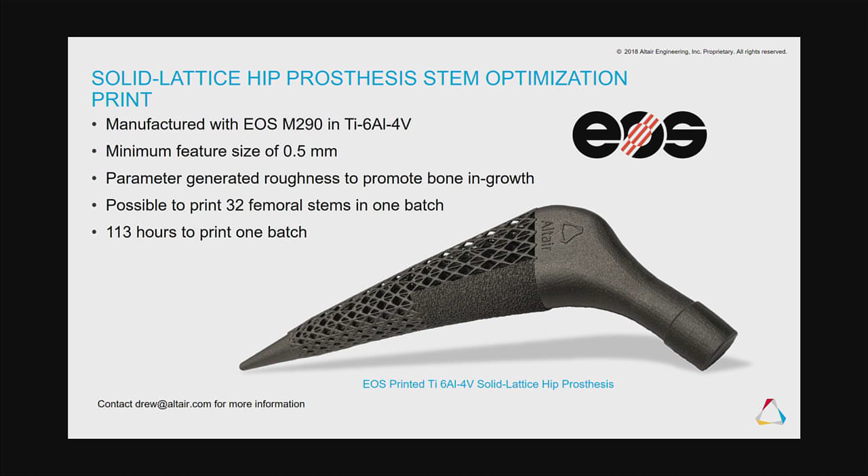So what you're really doing is targeting these same exact stresses so that you get a part like this. Here we're using some lattice optimization to get just the right compliance in all the localized areas of that implant. So just another example of setting up the objectives and understanding what you're really trying to design with these is very important.

So that's it. I just wanted to bring some of those examples to the floor because we see a lot about topology optimization, but I always want to leave people with the understanding that there's a lot of science behind doing it, and you have to be very cautious and really think about your engineering problem when you're doing it. So, thank you.